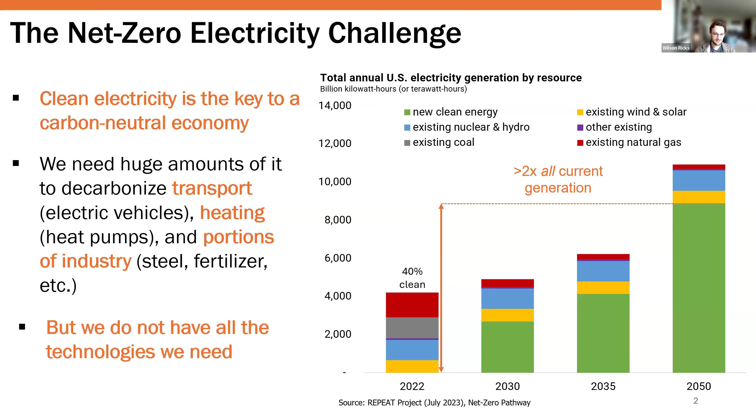These are not necessarily sufficient to finish the job, to truly eliminate fossil fuels from the electricity sector cost effectively. That's because while wind, solar, and batteries are certainly going to be necessary and will certainly play an extremely large role, there's a pretty extensive literature at this point demonstrating that you need something else to really fully decarbonize electricity 24/7.

You need something else to at least play a role in the system. That's either long duration energy storage that can help you cost effectively displace fossil power during long periods of wind and solar droughts, the fabled Dunkelflaute, winter weeks without wind and low sun, when you'd otherwise need huge amounts of batteries, or clean firm power, which is clean generation that is not weather dependent.

For this reason, it can actually be the case that even if you have clean, firm resources, like geothermal power, that are more expensive on a per megawatt hour basis than wind or solar, it can still be cost effective to include them as part of your net zero system, because they're more valuable in the times when it matters, when wind and solar would really struggle to deliver.

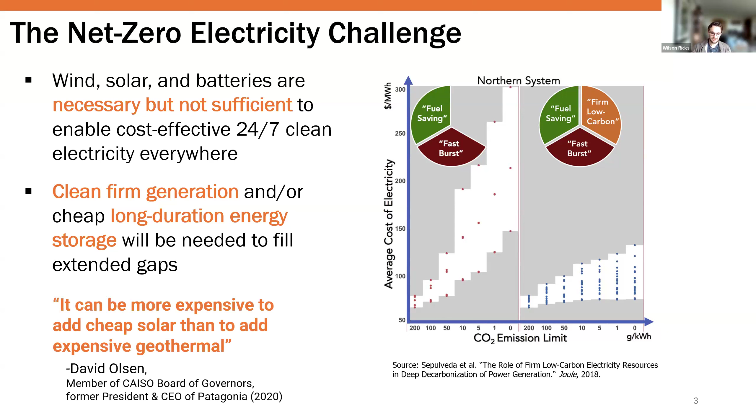Now, when we look at the pool of resources that could feasibly fill this clean, firm niche of clean power not dependent on the weather, it's actually a pretty small roster, and a lot of them have various trade-offs or limitations. In this list, I've organized them in order of lowest to highest resource potential.

Biopower, which is questionably zero carbon depending on exactly how you do it, also has extremely low resource potential because we need to eat food too, and there's constraints on land use for things like biodiversity, and a lot of competition for biomass in other net zero sectors like aviation fuel.

Hydropower is similarly clean and firm, though somewhat weather dependent based on rainfall, and also fairly geographically constrained to regions with large elevation changes. In the US, we've pretty much used all of the large hydropower we're ever going to build. Fossil with CCS, again questionably zero carbon, could possibly get close.

It has moderately higher resource potential, still dependent on fossil fuel reserves and injection basins, so you couldn't do this everywhere, but you could do it in a lot of places. And then nuclear power has fairly few limitations in terms of total resource potential, though maybe some non-proliferation issues.

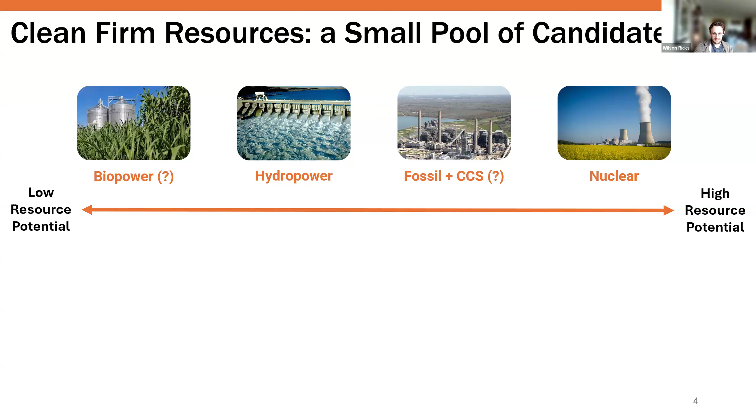But today I want to talk about the fifth major technology category in the clean firm niche, and that's geothermal power, which doesn't really factor into the conversation very much today because conventional geothermal power falls at the very bottom end of this spectrum. It is clean, it is firm, and it's available hardly anywhere.

It's basically a rounding error in total electricity generation today, which is why I want to focus more directly on next generation geothermal, which has the potential to unlock much, much higher resource potential and by extension play a much larger role.

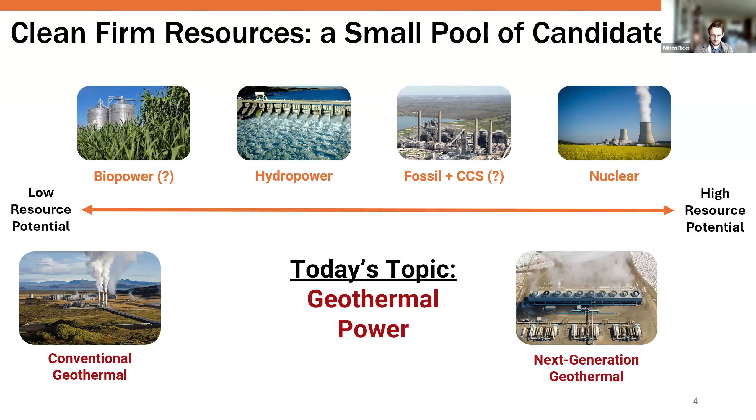Now, geothermal power overall is really an extremely simple concept. It basically just recognizes that the Earth is hotter on the inside than it is on the outside, and you can use this geothermal gradient to drive a heat engine to do useful work like generate power. The advantages of this are it has low or zero emissions because you're not burning a fuel, it's firm, so it's available around the clock because the Earth's heat doesn't depend on the weather, and it has extremely low surface land use because all you really need on the surface is a turbine.

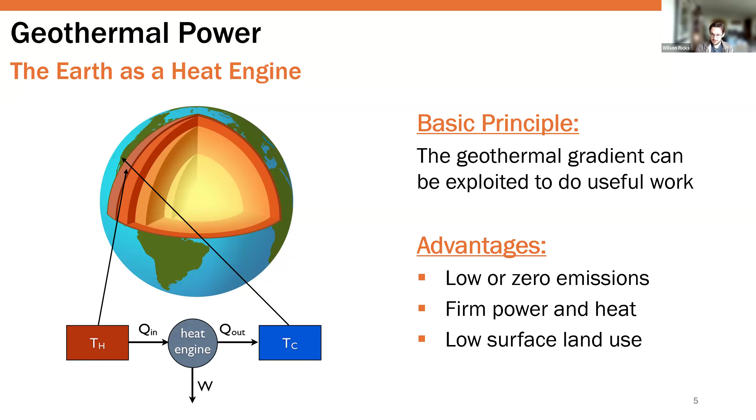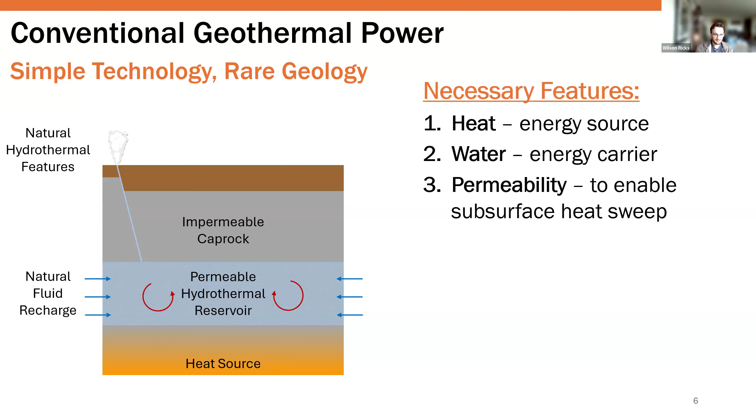Now, when you want to generate geothermal power today, or in the last 100 years, what you typically use are natural hydrothermal features. So you'd find an area where three particular properties coexist: heat, the energy source in the equation; water or some other fluid to act as the energy carrier to transport that heat from underground to the surface; and critically permeability, effectively a reservoir underground where water can flow freely and sweep heat from the subsurface, allowing it to be extracted efficiently, because otherwise you basically have no way to access the large heat reserves in the body of rock.

And when you do find all these three features coexisting, the technological approach is very simple. You just drill a well into your natural reservoir, pump water out of that reservoir, use it to generate power, and then inject the cooled water back underground to refill the reservoir.

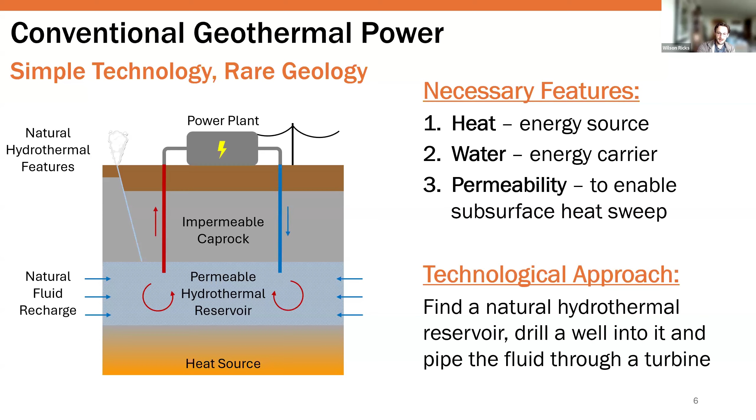We've done this for over 100 years at this point. The first geothermal plant was built in Italy in 1904. But despite that long history, geothermal in a conventional sense makes up just a minuscule portion of total electricity generation. It's about 0.5% globally, 5% in California, an example of a place with fairly good resource potential but also very high electricity demand. And there are some select places in the world where it's a much larger proportion, like Iceland or Kenya, where it makes up about 50% of total power generation.

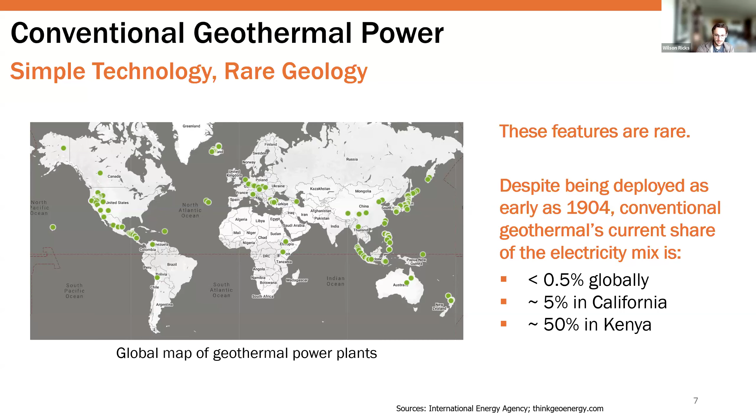But the upshot of all this is that I think it'd be fairly uncontroversial to say that conventional geothermal can't play a major role in a global energy transition because the resource is just so limited. These natural hydrothermal reservoirs are extremely rare geologic features, and they don't even always exist in the places where we actually need power.

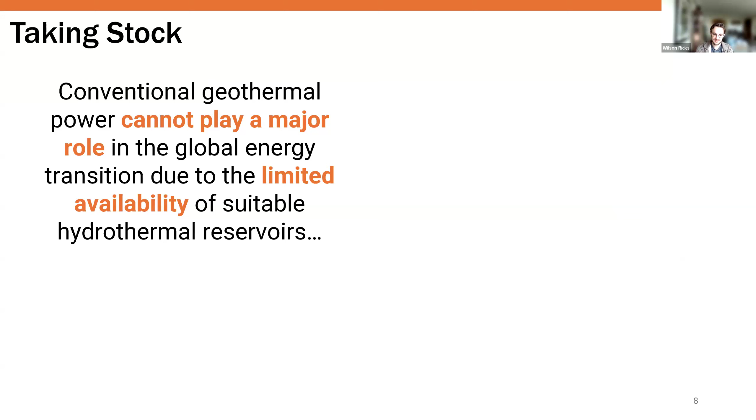But heat itself is not rare. And that's a key point here: if you drill down deep enough under, for example, the United States, and very likely many other areas of the world, you can get to temperatures high enough to generate cost-effective geothermal electricity—greater than 150 Celsius—without having to go extremely deep. There's variations in exactly how quickly you get to those temperatures, but in general, heat is much more common than heat combined with permeability and fluid in the form of these natural reservoirs.

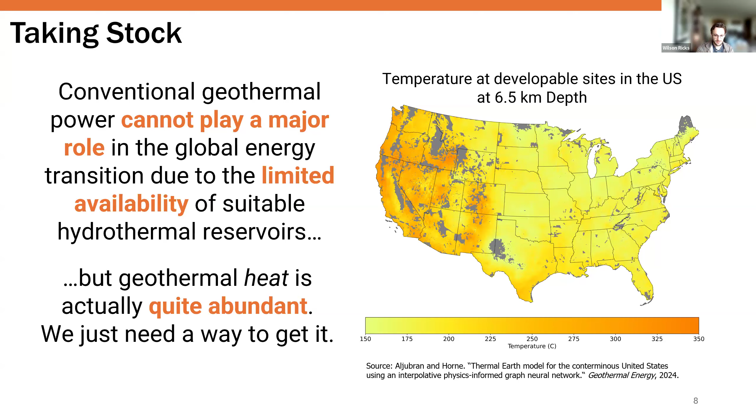This brings me to enhanced geothermal power, which is the next generation technology I want to discuss today. It's been getting a lot more attention in the news since I started working on it 5 years ago. This is designed to answer the question of what you do when you've got hot rock underground but you don't have a natural geothermal reservoir.

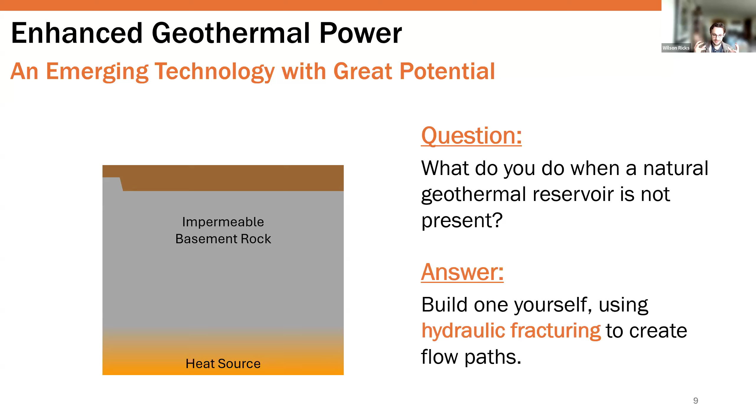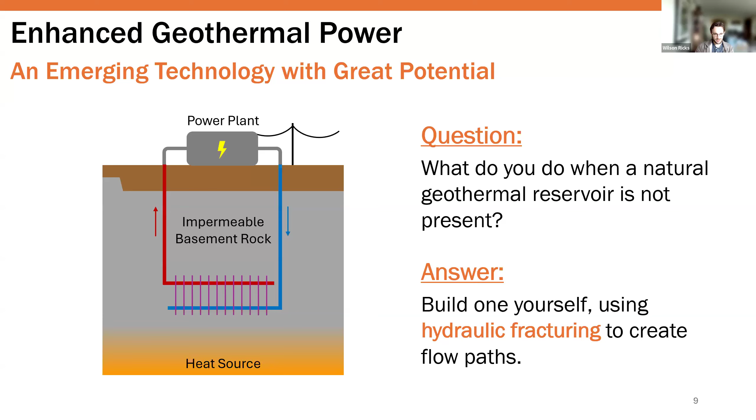The answer here, at least the approach in enhanced geothermal, is that you build one yourself using hydraulic fracturing to create the flow paths to effectively engineer your own reservoir. So this is basically drilling your injection and production wells and creating a fracture network between them. This is obviously a very stylized illustration, but you create a fracture network, a series of fractures along these wells that allows water to flow from the injection well through the fracture where it picks up heat because of the large surface area of the fracture, into the production well and up to the surface to generate power.

Enhanced geothermal, or EGS, which is the acronym I'm going to use from now on, is well understood to have a terawatt scale resource potential in just the US—likely multiple terawatts, potentially tens of terawatts—in just the first few kilometers of the subsurface. So very high potential, and it's been recognized for a while, and the technology has been researched off and on for decades, even going back to the 1970s at the Fenton Hill project in Los Alamos.

But it's only recently that it's actually really seemed like it's been getting off the ground and being seriously pursued, largely because of both increased demand for clean power and because the shale oil and gas boom over the last couple decades actually brought to scale a lot of the same techniques that would be necessary to do cost-effective enhanced geothermal power—directional drilling and hydraulic fracturing—which is maybe an underappreciated positive externality of that revolution.

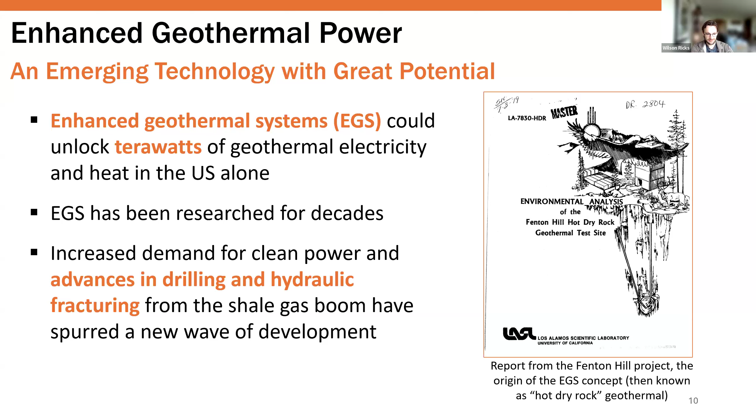This brings me to a few major research questions that spurred a lot of my dissertation, which I'm going to be discussing in the rest of the presentation today. The first of these questions—maybe the logic of doing them in this order makes more sense when you think about how much work you have to do to answer each one.

The first question I chose to look at in the context of my PhD research was: when you have this new technology, this new enhanced geothermal power plant—let's say you're building one for the first time or the 10th time—what exactly are the capabilities of this technology compared to both conventional geothermal power and other technologies that supply electricity today? And if you're building one of these plants, how can you optimize its design and operation to make it as valuable a zero carbon electricity resource as possible?

Beyond this, we wanted to answer the question of: okay, let's assume that you've figured out how to make this the best thing it can be. What kind of role could it play in the energy system? Where does EGS fit into the niche of clean firm power? And just how does it interact with things like wind, solar, batteries? Where does it benefit? Where does it compete?

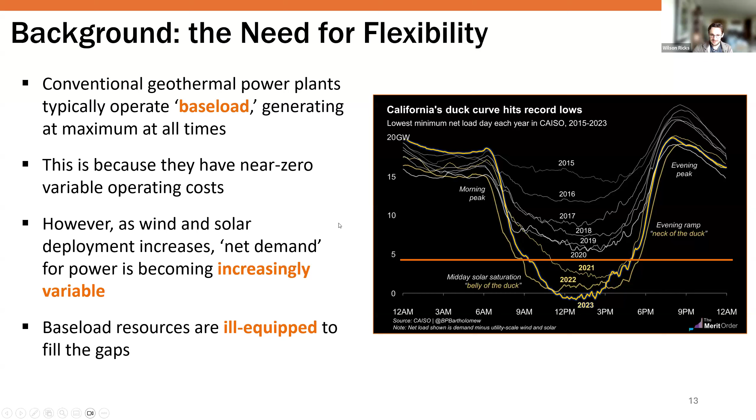But while conventional geothermal power is a baseload resource, the key realization is that enhanced geothermal power doesn't necessarily have to be. In fact, this concept of flexible operation of enhanced geothermal power, which in this paper we called in-reservoir energy storage, has been investigated all the way back to the 1990s during some of the earliest EGS test projects.

The principle is that unlike conventional geothermal reservoirs, which are large permeable things connected to surrounding geologic systems and not necessarily confined, so water flows into and out of them, EGS reservoirs are created in rock that is not permeable—not necessarily dry, but doesn't hold like an aquifer. They can actually retain fluid and pressure much better than a conventional reservoir.

What this means is that if you take your EGS power plant, injecting water at a constant rate and producing it at a constant rate, and suddenly reduce the flow out of your production well while still injecting water into the reservoir, the water is trapped in the reservoir, more or less, and the pressure rises as the fractures themselves expand and the water slightly compresses. You can do this when power demand is low and you don't actually need to produce power, to increase pressure and accumulate fluid in your reservoir.

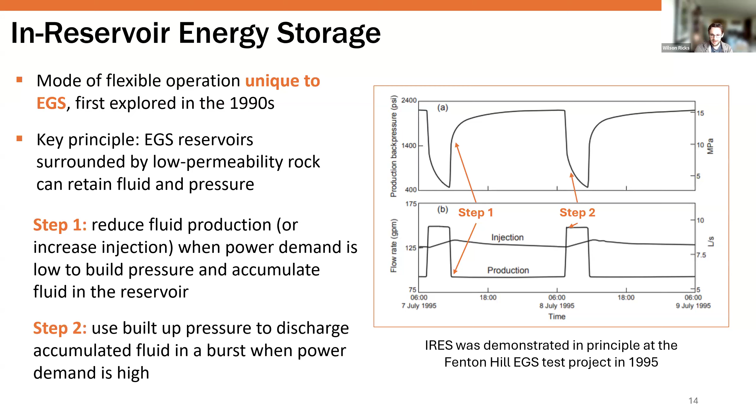The approach we took in this project was to investigate the actual capabilities of EGS power plants operating in this way. How long can they store power? How efficiently? How strange are the actual behaviors, and how controllable are they? Then, when you optimize plant operations around this, how valuable does it actually become if you assume you can exploit differences in electricity prices?

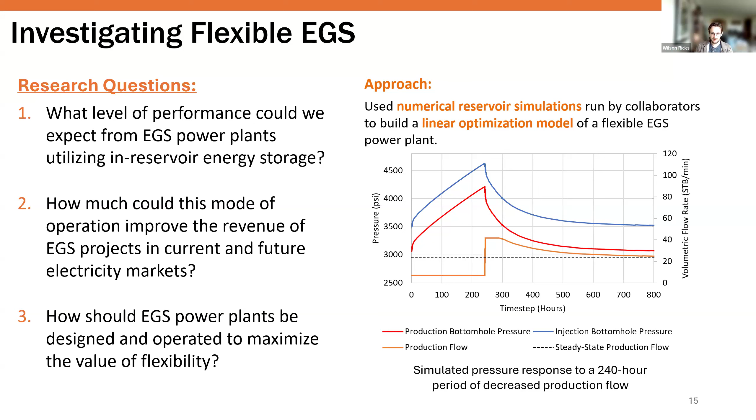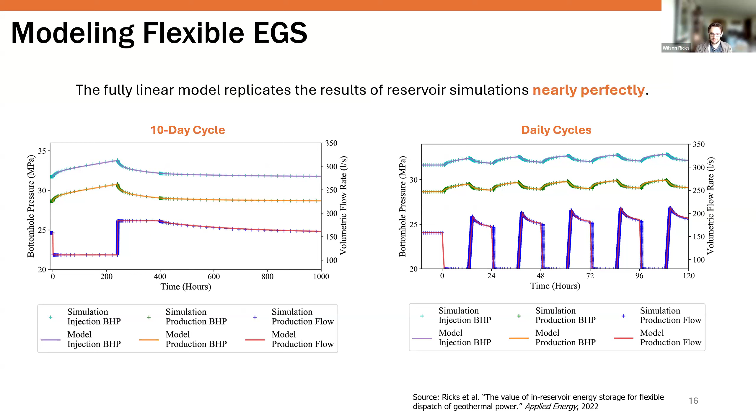What we then did with this model was optimize the operations and sizing of different components of these plants against various input electricity price series. So we assumed we had a plant in, say, Southern California. We put in hourly electricity prices over a year, and asked how much value can you get out of this kind of cycling behavior compared to just flat baseload operations?

What we found was that the answer is a lot. You can actually get a lot of excess value by operating flexibly compared to just baseload, though this depends on the market and how variable electricity prices are. We found an improvement in value of more than 50% in Southern California, where right now you have high amounts of curtailment due to grid bottlenecks and lots of solar power.

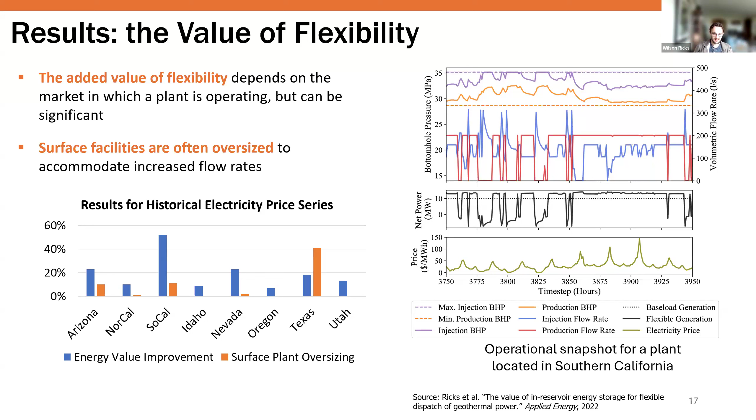The plants were very eager to undertake these complex operations to really exploit periods of very high electricity prices that they could get by storing power during some times and shifting it to other times. This would often entail oversizing the surface turbine to actually allow you to get more power out of those periods of higher burst flow. So it had some implications for how you should actually approach the design of enhanced geothermal power plants.

We also performed some controlled tests on just the capabilities of these plants. We found that the effective energy storage capacity of one of these simulated reservoirs was on the order of days to weeks. So this is extremely long duration energy storage by comparison to something like a lithium-ion battery. And we found that if you compare the relative total generation of a plant doing one of these cycles to one that just generated baseload, you get an effective round trip storage efficiency of 60 to 90%, which is surprisingly high for a long duration storage technology.

Something like hydrogen storage is on the order of 30 to 40%. So this is a potentially key advantage. The difference between this and other long duration storage technologies is that you have to build a whole geothermal power plant to access this. So it really only makes sense if enhanced geothermal itself makes economic sense.

I want to move on now. This kind of project was basically us confirming that this flexible operational mode was something that had potentially high value, and differentiated EGS compared to other conventional approaches, and something like nuclear power, for example.

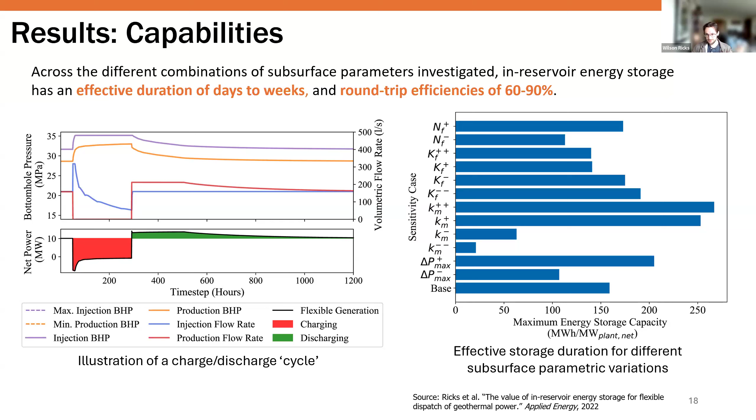And I want to move on to work that we did trying to assess how EGS could integrate with the broader electricity system and the role it might play and the impact it might have. This work was still predicated on the question of what operational flexibility can do for us in this case. It was focused on looking at how flexible EGS could change the long run value, deployment potential, and overall role of enhanced geothermal power in low carbon electricity systems.

This was a much more expansive piece of research. It involved not just reservoir simulations, but also the incorporation of enhanced geothermal power into a broader electricity system capacity expansion model, where we focused on the role it could play in the Western US grid in a hypothetical decarbonized year 2045. And because we needed the model to be able to choose whether to build EGS or not, we needed a good sense of what the relative resource quality was across the Western US.

So we did a pretty detailed resource costing exercise to build supply curves, basically showing how much, at a given technological advancement assumption, of this resource could you build in each region at a given cost.

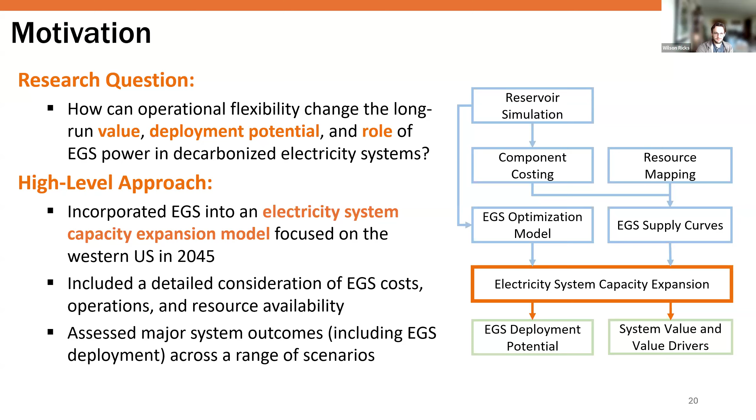At the end of the day, we were assessing things like EGS deployment and impacts on electricity sector costs, across a range of scenarios, particularly focusing on the question of flexible versus inflexible operation. This was again integrating the more focused, technology-specific plant-level model we built in previous work, with a broader optimization of the bulk electricity system in our model GenX.

And so we had the sizing of all these various components of each individual power plant or EGS power plant in the grid, as well as the operation of those components, which then fed into the broader electricity demand balance constraints of the system model. We used an 11-zone representation of the Western US for this study.

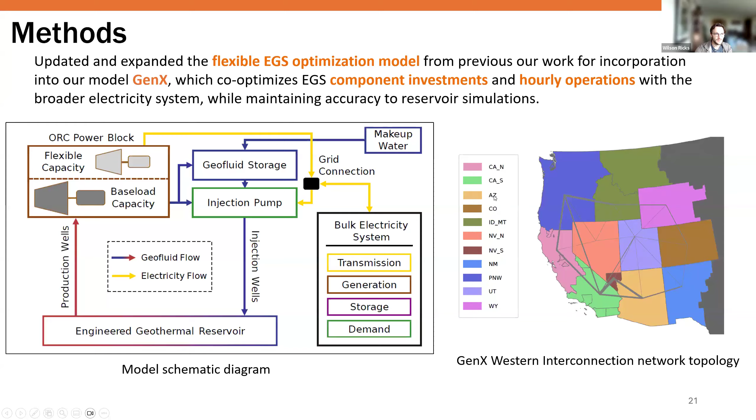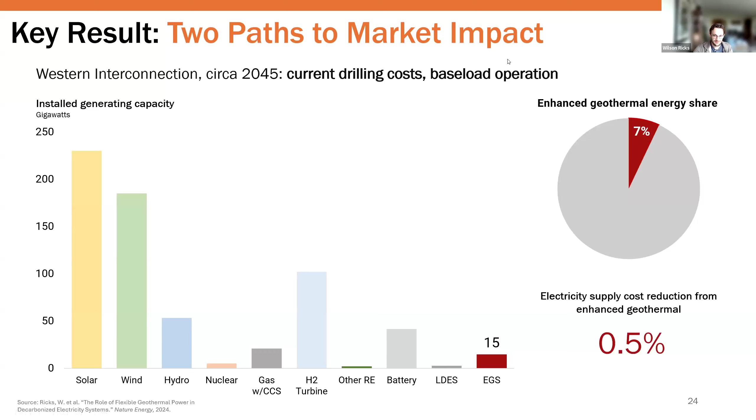Another key result of this work was that we identified multiple paths to market impact for EGS. What I'm showing here is a baseline case where we assume current drilling costs for enhanced geothermal power, a more sophisticated reservoir design than has currently been demonstrated, but no advances in drilling cost, and baseload operation. When we allow the model to decide whether to build EGS in this case, we get about 15 gigawatts of total installed capacity in the Western US, which is way more than we have geothermal power today, but still a pretty tiny portion of total generation. The actual reduction in electricity system cost compared to a case where we don't allow it to build EGS is only about 0.5%, so this isn't making a huge impact on the overall cost of a decarbonized grid.

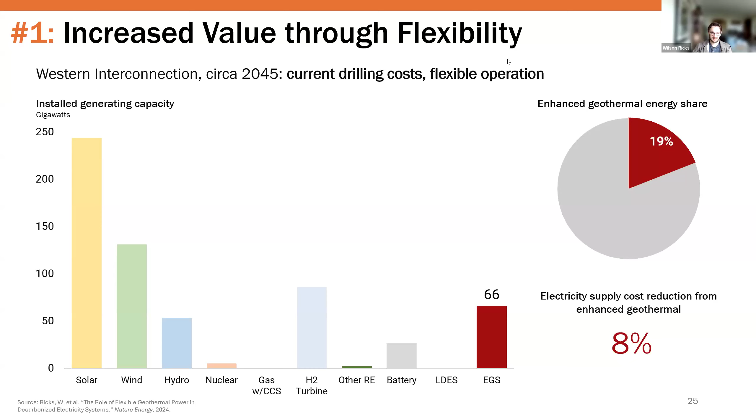But if we allow EGS to operate flexibly—this is the exact same resource, same costs, everything, but only allowed to operate flexibly—we see that deployment more than quadruples in an optimal case. It now makes up almost a fifth of total generation in the region, and it reduces the cost of the system by up to 8% at this point, so really starting to make a significant impact on electricity costs.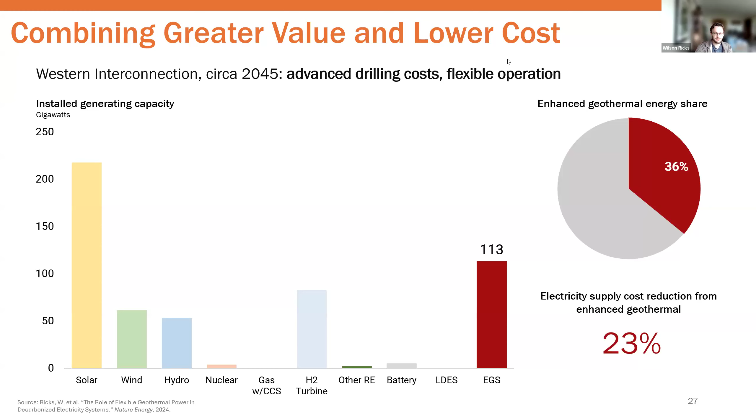Now, that's obviously one hypothetical future. But this is assuming a decarbonized year 2045 where you have EGS available at scale at reasonable cost. So one question we were really keen to answer, which the next bit of work really tries to tackle, is how might we actually get to this future, particularly from where we are now.

The background here is that since we started this work, there's actually been some pretty substantial advances in EGS development in the field. When I started working on this it was basically just theoretical, but starting in 2023, we've had multiple multi-megawatt field tests of enhanced geothermal systems.

There was a 3-megawatt pilot project by a company called Fervo Energy in Nevada, which started operating in 2023. A DOE-funded test site called Utah Forge also did a successful flow test in 2024. Then Fervo again built a 10-megawatt flow test in August 2024, and they say they're on their way to a 100-megawatt demonstration project coming online by next year.

These flow tests indicated that you can get good connection between these wells via these artificial fracture networks. And also, one of them showed that you can operate flexibly, because we got an ARPA-E grant to demonstrate flexible operation in the field based on some of this previous work. It turns out that it basically works as we would expect it to in the simulations.

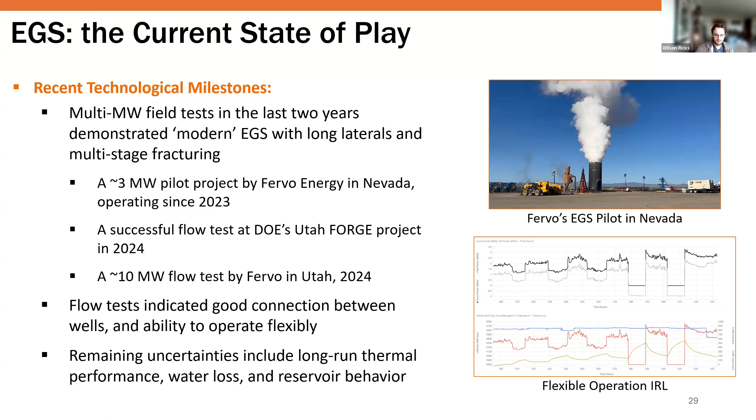Now, there are some remaining uncertainties. We don't know how these systems are going to perform over the long run in terms of whether they keep their heat well. We don't know how much water they're going to lose over the long run, which is a pretty important factor. And we need to understand how reservoir behavior evolves, especially in response to flexible operation. But overall, there have been some very positive developments.

So now the question really becomes—these prior studies have assumed that EGS is available at competitive cost and commercial scale at some future date. But in reality, as a nascent technology, it's going to face scale-up constraints. It's likely going to see its costs start higher because it's new, and come down over time via what we call learning by doing, which is the same phenomenon that led to solar, wind, and battery costs declining massively as they hit greater and greater deployment.

So some open questions here are: where might early EGS actually come in terms of its cost? Where might it first be market competitive? And how could the scale and timing of those initial deployments affect its overall long-run deployment potential?

So in this study, we structured it in two components. The first was attempting to establish a near-term cost baseline for EGS, using the latest field data from some of these early projects, which we didn't have before, to actually create empirically grounded national-scale EGS supply curves for the near term.

The second part of this project was to then use these supply curves as the inputs to a multi-stage electricity system capacity expansion modeling exercise, where we included learning by doing as an endogenous property of the model for EGS and a few other emerging technologies.

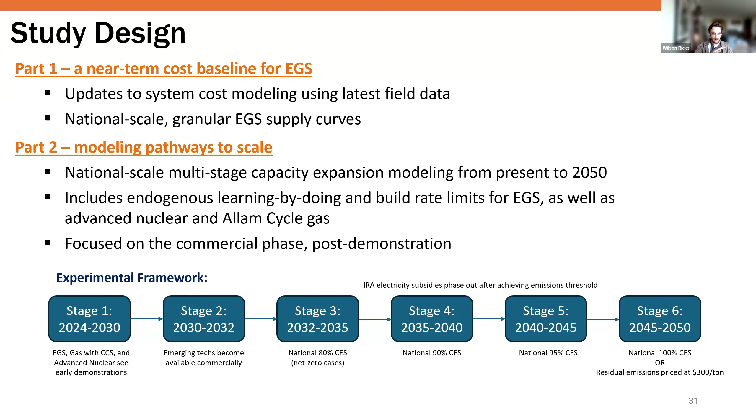This was basically to look at how the actual deployment of EGS could evolve over time if we assume that it benefits from learning curves similarly to wind and solar power, and comes in at costs similar to the ones that we are projecting in the early 2030s.

So if we look first at the results of this costing exercise, these were again constructed based on a cost model we developed previously and published data, assuming some fairly incremental advances in system design, and based on national temperature-depth maps for the geothermal resource quality. This plot shows costs. Our baseline is the actual baseline cost projection, and then the high and low cost values are just plus 50% minus 33% to the cost of the subsurface.

But what we find is that generally outside of the Western interconnection—so outside of the Western US, in Texas, in the East—near-term baseline EGS costs are likely too high to be commercially competitive. So this is $100+ a megawatt hour, roughly, unsubsidized.

I think this is unsubsidized. Whereas in the Western US, they could actually be reasonably lower, especially at what we're calling near field sites, which are places close to conventional hydrothermal systems or natural hydrothermal reservoirs. The areas around those are well known, and they're areas where there's unusually high temperatures close to the surface. So they're kind of prime prospects for early EGS deployment, and we find it could actually be fairly competitive in those areas.

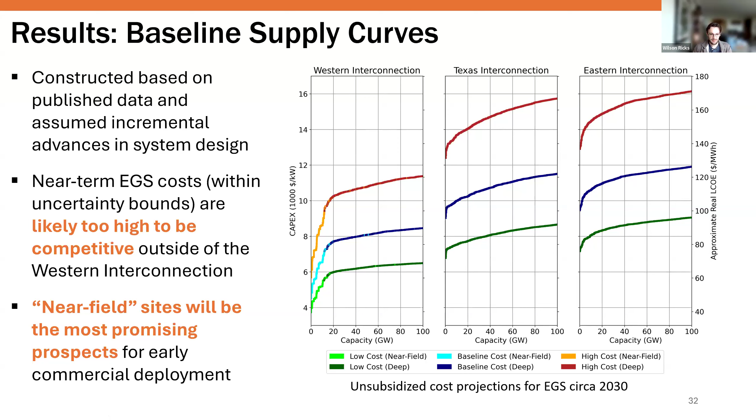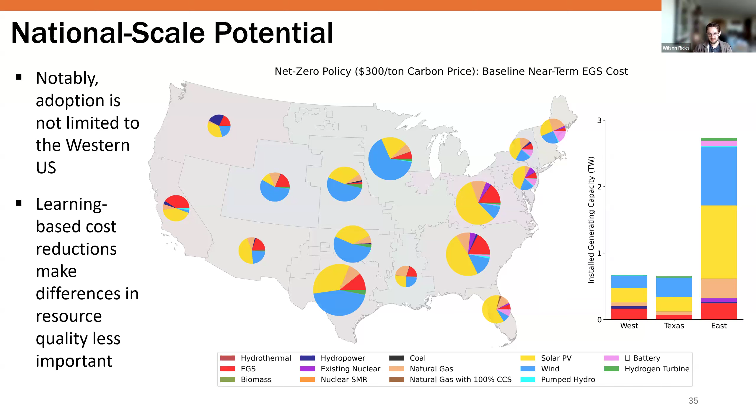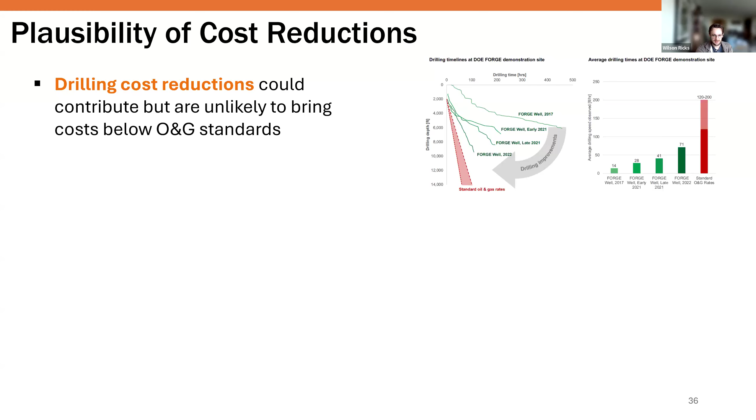Now we also wanted to look at whether these results were obviously plausible, because we can't just say the model says it's going to be too cheap to meter. So we looked at drilling cost reductions as one potential approach to reducing the cost of EGS overall. We found these could contribute because drilling in hot, hard rock is still less mature than standard oil and gas drilling, which has been done in millions of wells. But drilling overall is mature enough that this is unlikely to bring down costs massively, at least enough to deliver the kind of national scale adoption we see here.

Instead, what we find is that most of the cost reductions we need to see happen could plausibly come from improvements in reservoir design. So like I showed you that reservoir before with the 5 well laterals, you could add more well laterals in parallel, basically incrementally increasing the amount of subsurface area accessed by each well. You could also add them on top and on bottom. You can make the lateral section longer, so you drill the vertical only once, and then you access 10,000 feet of lateral instead of 5,000 feet. And basically, all of these advances, if you add them up, could plausibly lead to a very large reduction in the overall cost of EGS well field, and unlock these very promising long-term pathways, though obviously real-world validation is needed.

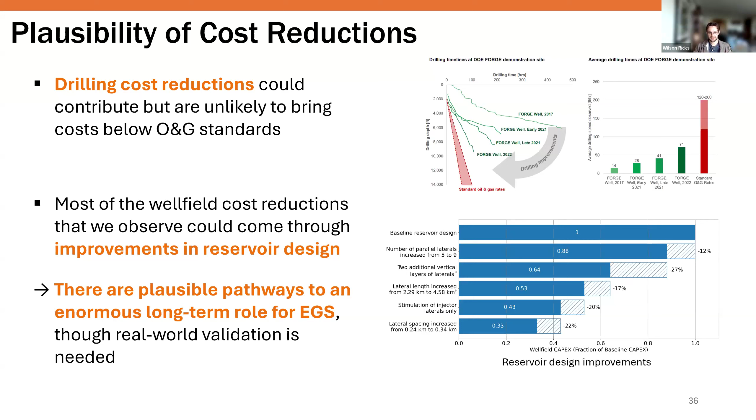So the overall conclusions I want to leave you with today are, first, based on the currently demonstrated performance and reasonable learning rate assumptions, there is a very plausible case to be made that EGS could become a major source of carbon-free electricity generation if it can achieve large-scale deployment within the next decade.

So that early deployment is really a key, make or break moment. The second part is that if EGS can benefit from learning-based cost reductions, we found that it could actually likely meet the entire clean firm power needs of the continental United States, if needed, on its own. So there is a world where if we don't see successful scale up of other clean firm options, EGS could potentially fill that role on a national scale, which is a pretty novel result. I think it's largely previously been considered something that's only relevant to the Western US, but it is not necessarily.

So with that, I think I'm gonna wrap things up and open up to questions.

Thanks, Wilson. So to remind participants, there is a question and answer function, so please submit your questions there. I will start out with a question. Thank you for going through this, it's wonderful to see how your research has evolved since 5 years ago. My first question is, what are some of the real or perceived barriers to deploying enhanced geothermal at scale, beyond some of the technological constraints?

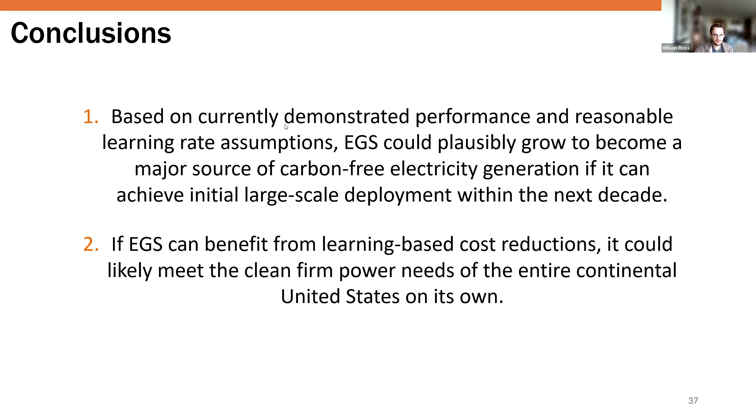They cost anywhere between $2,000 and $4,000 a kilowatt, so they're not cheap. Actually, when you get to reasonable cost for the subsurface, the surface power plant becomes potentially half or even the majority of the total cost of the installation. So if we can make these cheaper, that would also be really key.

There's actually a lot of signs that you probably could make them reasonably cheaper, especially with mass standardization, because current geothermal power projects are incredibly boutique. You basically build a custom 10 megawatt power plant for a custom project trying to exploit one unique reservoir that can only support that much, with its own resource temperature, chemistry, etc. There have been studies showing that if you actually standardize the production of these turbines and produce 10, 50 megawatt units at a time, you can drastically reduce their cost. So this might be something where we see significant reductions, though it still needs to be proven out in the field.

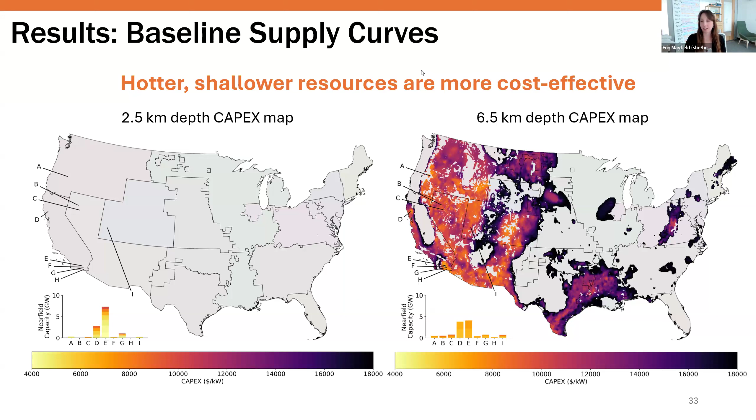So I have kind of a policy question. You had your different policy scenarios, one bounding being your net zero scenario. What types of policies do you see bridging the gap between current policies - and I say that with hesitation - and a net zero policy? What are the actual policy instruments to move between current policy and net zero policy to support geothermal?

I guess there's a question of what I use in the paper, what I assume in the paper, and what I would recommend. In the paper, our net zero cases basically assumed that Inflation Reduction Act tax credits continue, and that starting in 2035 there's a national clean electricity standard, going from 80% in 2035 to 90% in 2040, 95% in 2045, and 100% in 2050. Either 100% net zero, or one case where you can miss that if you pay a carbon price of $300 a ton, so gas can basically stay in the system, just paying a very high carbon price. That's not necessarily me commenting on what I think is the best approach to net zero, just some illustrative examples.

We did spend some time in the paper looking at potential near-term policies that could boost EGS deployment. There were a few that are obviously key - boosting near-term deployment could be a key tool in unlocking long-term potential.

One thing I think can be really cost effective from a societal perspective is, at least for any emerging technology, some sort of deployment mandate. If you have, say, 5 gigawatts of deployment of EGS or advanced nuclear or anything else at a national scale, it's really not going to make a big impact on budgets, but could have huge long-term dividends if it helps something get down the learning curve.